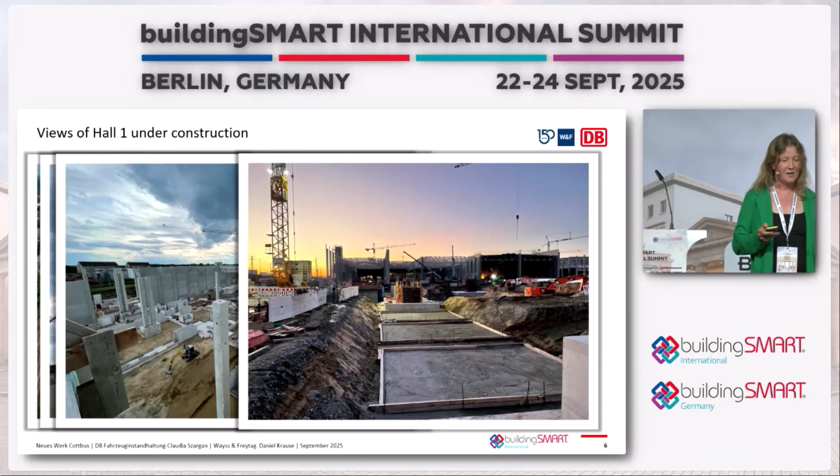The second one that's just started already is the big one. Also a lot of dirt, columns, and big foundation. And altogether, we have 1 billion euros needed here to get this finished. You see here the storage facilities, and we go into the main hall, where you see also the service pits where the trains will be in, or also the facility, how it will be finished.

So what is it done with, what's about the integrated project delivery and BIM? What's it about already? This is a special contract form where you have a multi-party contract with different people. The clients, the planners, and also the contractors are in the project from the beginning on and working on it, sharing risk, and moving forward together as a team.

And how is it done? Of course, by the money first. We start the planning phase with the building contractors. So the planning is done by the planners, and the building contractors get their experiences, how they do, what suppliers they have, materials, processes, and they know what things cost. So they all plan it together, and in the end, we have a target design, a budget. That's the big pot where everything comes in, the costs, what you calculated, and also the risks. You have a budget for risks, and this is the big budget.

In the end, after we are finished with the construction, you will see how much is still in the big pot, and if there's still money in it, it can be shared with everyone, so everyone has a profit. If not, we will see. So everyone has an interest to work together as a team as much as possible.

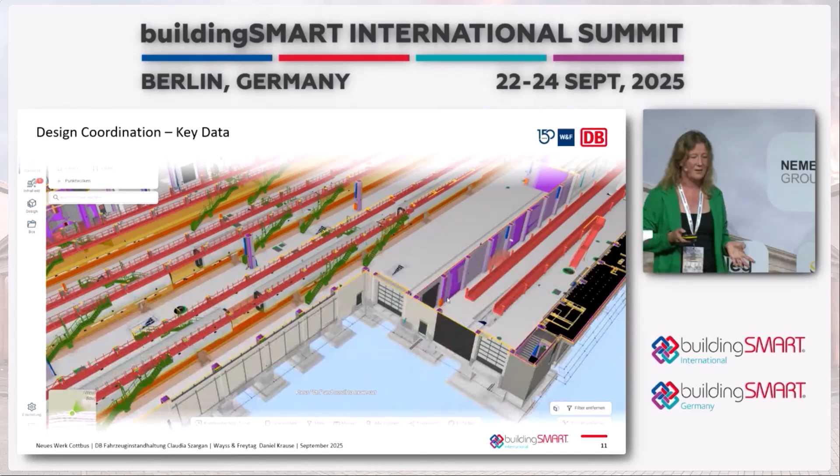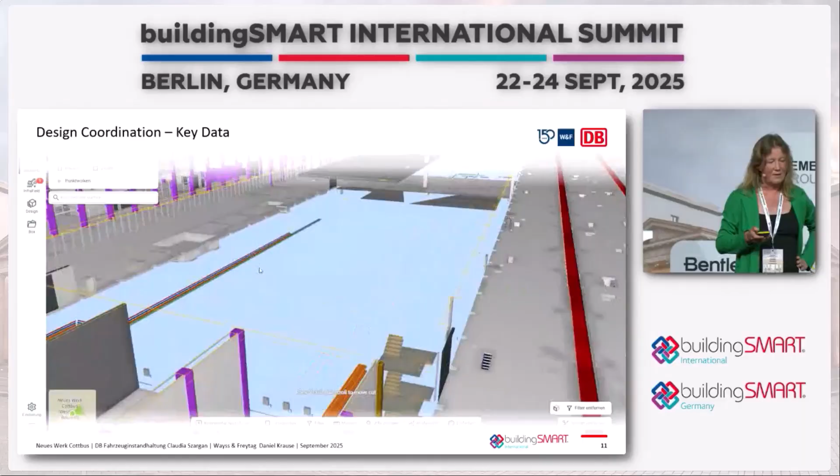So you see now a little bit of our model of our big 5-track hall. And you see here, this is Dalux, the software. It's actually right now used the most. That's where the main model is in it. And it's actually working really good to see in practice how people are working with the model.

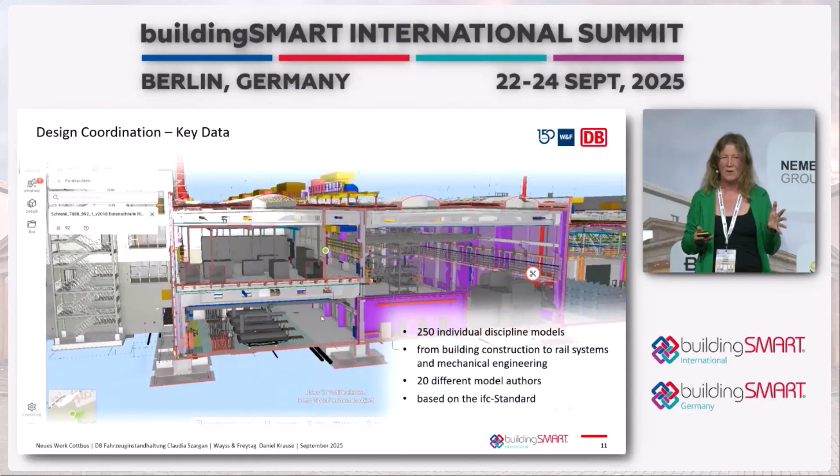We have about 250 different discipline models and 20 to 30 planners when you add all the special machine models. So it's really a lot of people to harmonize, and a lot of work with the different CDEs.

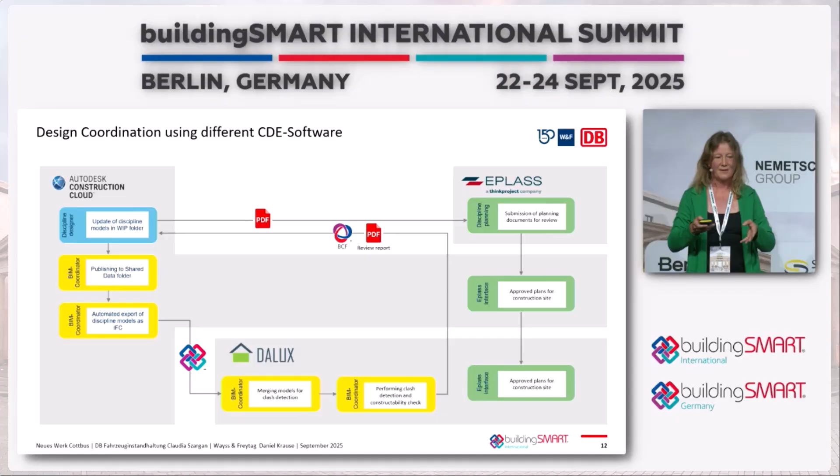So we start with Autodesk, where people work and share their models. Then it's made to IFC, and then it goes over to Dalux, where we get it all together and do the clash detection, and then in the end it goes to our Eplass for the approval process. That's the plans, and the plans go back to the people on site. So that's how we try to harmonize the main process.

And now I go over to Daniel, who's talking about what he's doing. Okay, thank you, Claudia. Hi everybody, good afternoon also from my part. I have the pleasure now to walk you through some of our use cases, but before we go into detail there, I want to show the whole picture.

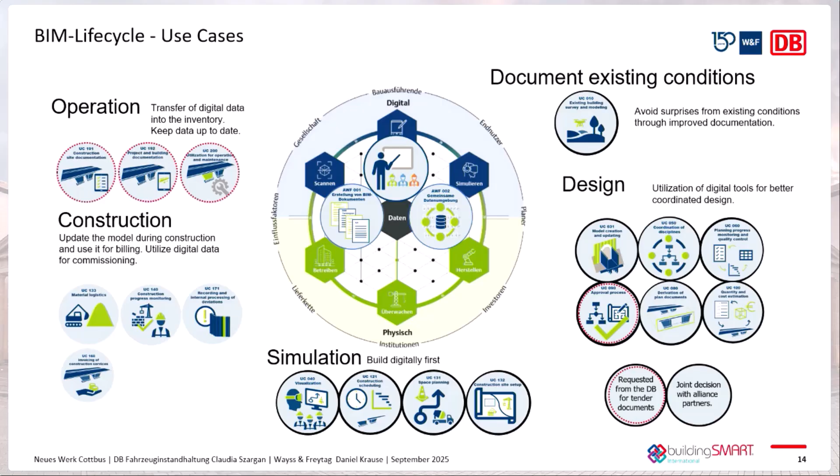And we ended up with 21 use cases, best for the project throughout the whole life cycle, starting with the digital documentation of the existing conditions, going through design coordination, simulation and visualization of the construction phase itself, using the data from design on the construction site, and also getting data back to the models from the site. And last but not least, most interesting maybe for the operating company, the operation and use of data in the maintenance phase.

Of course, we don't have enough time to go through all of these use cases, so I want to focus on 4 that were really, really helpful to work together and get the best out of the data in the whole collaboration project.

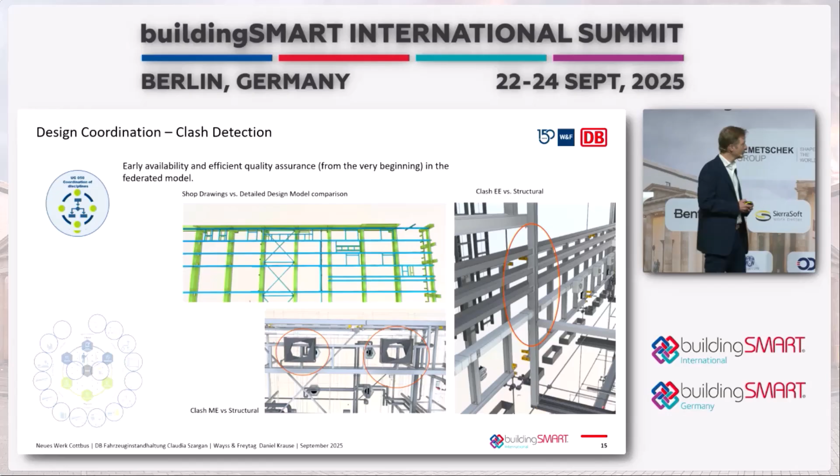For my part, talking for a construction company, it becomes even more interesting if you link 3D data to time-related data. Why is it so important for us? Because this is where we come from—these nice Gantt charts in complex projects having more than 800 up to 1,000 activities in them, really complex. If you're not a specialist, it's hard to understand the interdependencies and all the information behind it. So is this a good basis for working together?

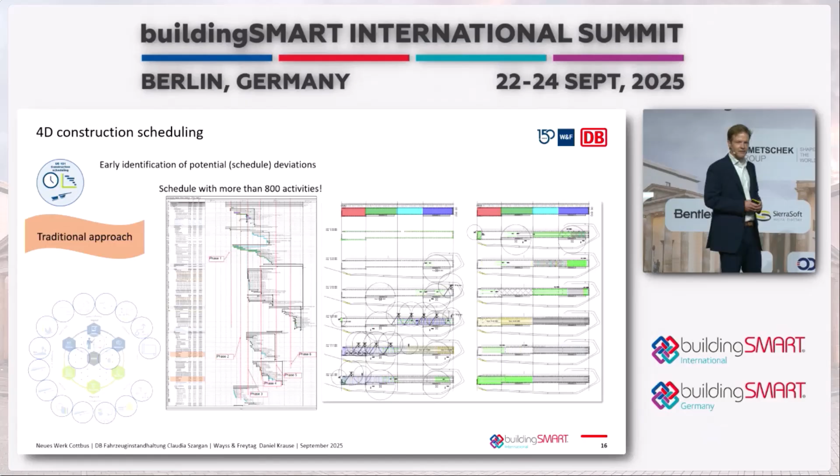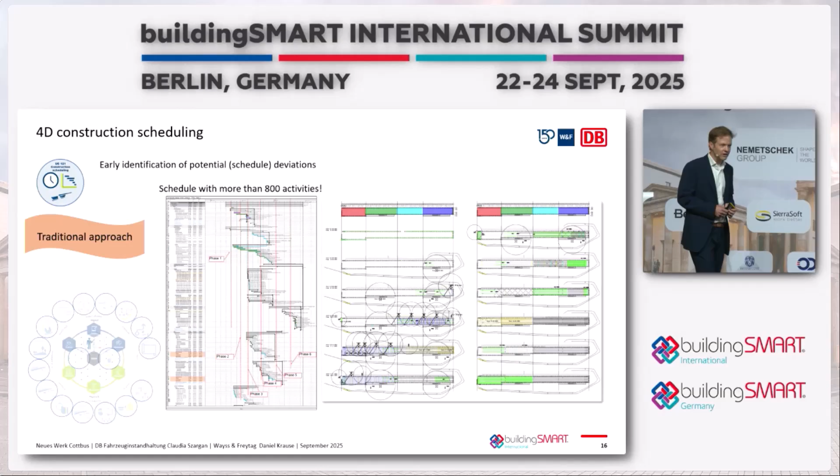I would say probably not, because only the specialists know what to do with it. So what do we do then? We do these phase plans where we try to visualize how the construction site looks at different phases in the project, drawing them manually—really tedious and manual work. And still, it's hard to identify the inconsistencies and problems that might arise in construction. It's a lot of work, especially with a dynamic process that changes every time the schedule or the model changes—you have to do it all again manually.

So what do we do? 4D—I think everybody knows it. It's when you connect the schedule to the 3D model, and you get these nice videos where you can see in color what is being constructed right now, what is finished, maybe what is in delay. It helps you understand how the building is being constructed, and it helps you communicate problems that might arise. But this could be a really time-consuming and tedious process to link if you do it manually.

So what do we do? We have a process, the project information structure standard, and we have this information in the model, and we also put it in the schedule. This way, we can use rule-based algorithms to link the activities. Very, very helpful, as I said.

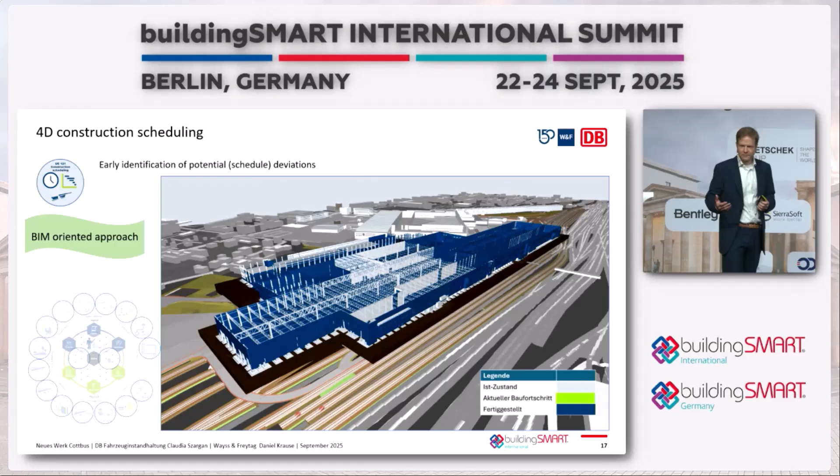But if I go to my construction workers on site and show them this, they say, well, it looks nice, but it really doesn't help me in my daily work because it's not detailed enough. So this is why we identified problems where we did a more detailed 4D simulation.

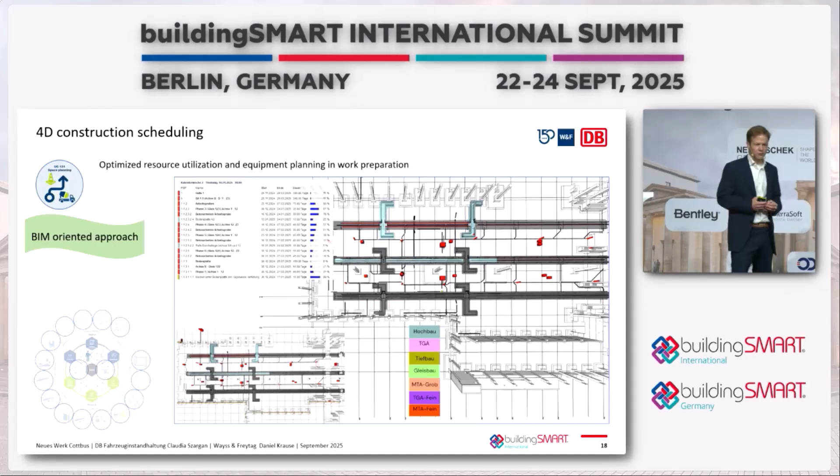For example, what you can see here is the construction of these working pits underneath where the trains are being maintained when it's finished. The problem was that the steel structure of the hall was already finished and constructed, and there really wasn't a lot of space to get all the equipment and machinery in there, with different companies working there. So together with our work preparators and the subcontractors, we sat together and created some scenarios about the sequencing and about resource use and where to do what. And we were able to identify the optimal solution for this process.

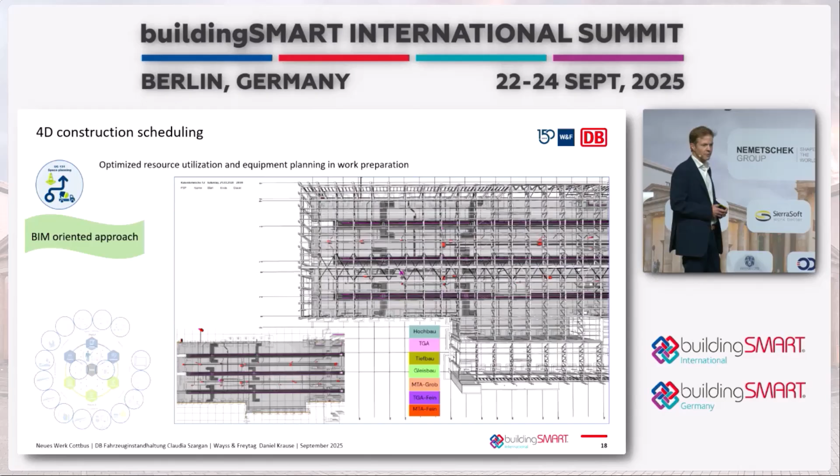Just an example for a detailed use of a 4D model. And now the last use case I want to show is also 4D, but not only about the building—also about the logistics, about the workspace available on site and the storage areas.

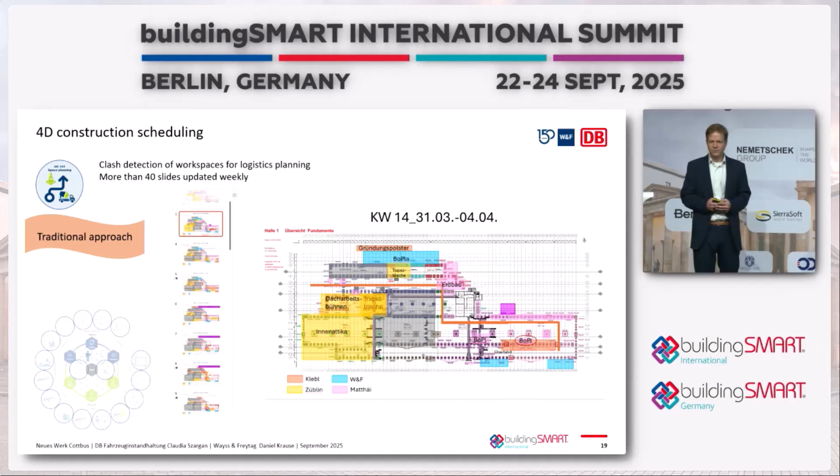Why did we do this? Because, again, here you have these really time-consuming manual works where you draw pictures for every week showing where everything is placed on site and where everybody is working, to avoid collisions between subcontractors on site. And also here, if something changes, the person has to sit in the office again and do it all anew. What did we do there?

We added 3D objects to the model, representing the workspace and the storage areas. Then we put the information of the company doing the activity into the schedule. With the 4D simulation, we were able to see if more than one company was working at the same time in one of these workspaces, and if so, whether they were competing. Sometimes companies can work together, of course, but beforehand we could define which companies would clash. So like the red areas or spaces there, you could see their collisions.

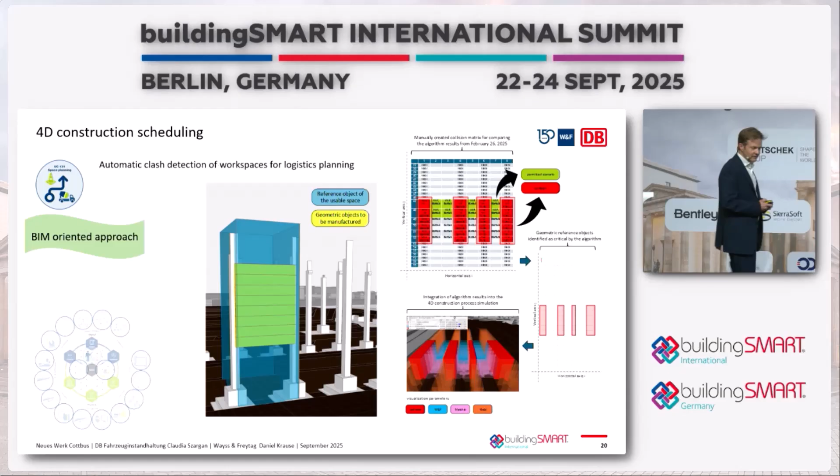You could identify this beforehand and prevent it, because as we know, on site it costs a lot to change things. And if a company is hindered and can't work, it costs a lot of money. All right, this is just some examples from the use cases.

Now you have learned that we have a good contract model that supports our BIM processes. We have technologies, we have everything that we need, but the most important thing is we also need the people that work with it. And there, it's a nice link to the session we had before. We are very proud that we're part of the training program, certified provider of this training here. And Wayss & Freytag has already trained almost 200 people now from within the company, from the 12,000 in total, as we have learned before. Yeah, and it's really good and helps us to get all these BIM uses, the theoretical things, on site where it really adds the value into the project.

So I'm almost finished. The last message from my part is let's work together. We have everything that we need. We know how to do it. We have seen in practice that it adds value, that we can get something out of it. We just have to do it, get the stuff into the project, and let's work together on that. Thank you.

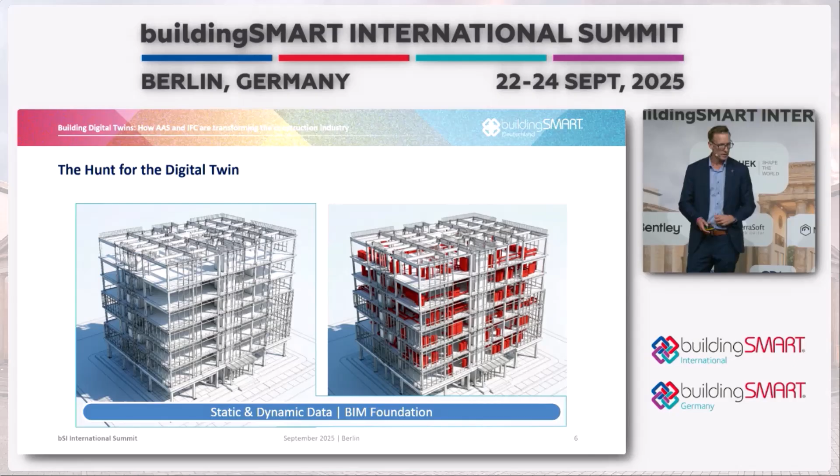And as I said, I think it's a perfect match we have here, and we have probably not really made use of that. The BIM structure is the foundation to really create a comprehensive digital twin, including every data asset and every part of the building. So why did buildingSMART International think this is a great idea? If you look at our process, and this is an oversimplified process, we are talking about design, engineering, construction, reuse maybe at the end. So this is our world we are quite happy with, and we are earning money in.